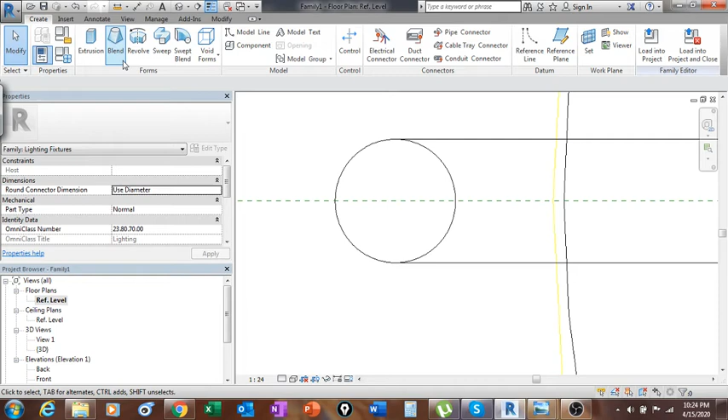Extrusion. I can pick up a line, or I can, yeah, why not? I'm gonna pick up this and this. Not gonna give it any specific depth. I'm gonna fix that on the elevation. I think I'm done with this. Hit OK here. Let's go to the front and see what we have.

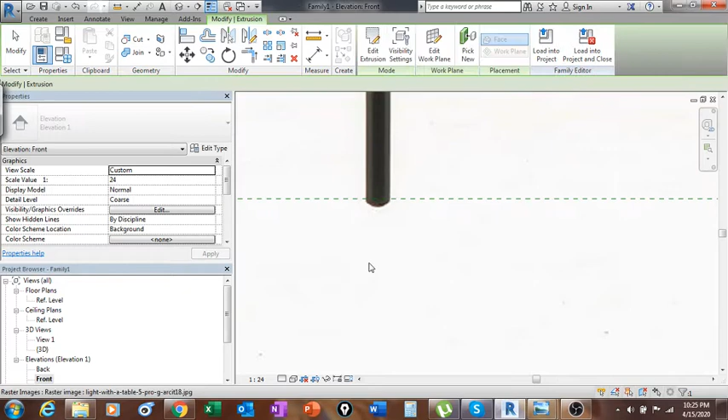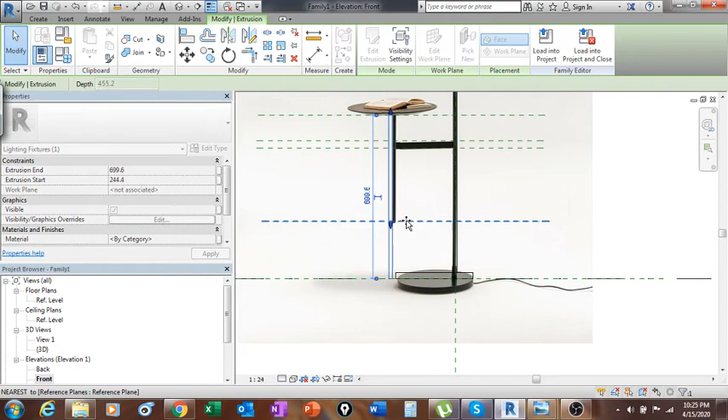So we have this piece. Let's take it. I can lock this, no problem. I'm gonna take this up to here. I'm gonna lock this also. Great. This is aligned with this, right? So great. So now let's draw this piece.

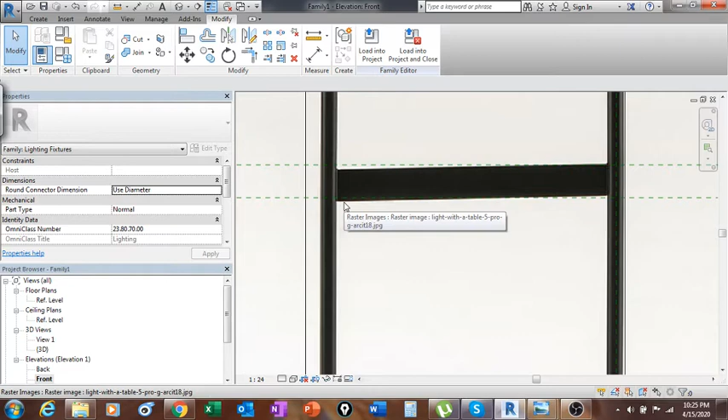So this I can do it from. It's gonna be an extrusion, right? It's a square section, right? So I can do it from here, or I can do it from the top view. I think I prefer to do this from the top. So let's go to the top because I have these reference planes I can use. Now, so yeah, let's do it. It's gonna be a simple extrusion, right?

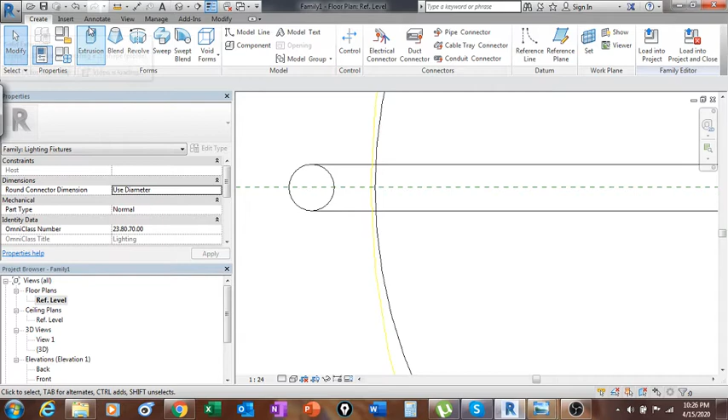So I'll create extrusion, and then what I'm going to do is, let me see, this is 8. I'm gonna make it slightly smaller, right? So it seems to me in the drawing that this piece is slightly smaller than the actual diameter of these two pieces. So that's what I'm going to do. So I'm gonna pick these lines and I use a 6 offset, and I pick this here and pick to the other side.

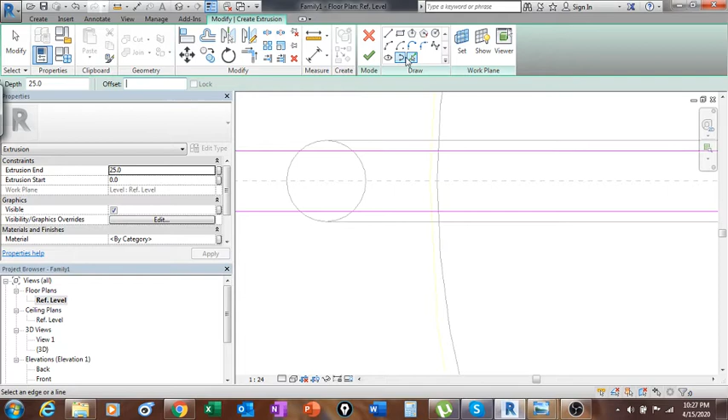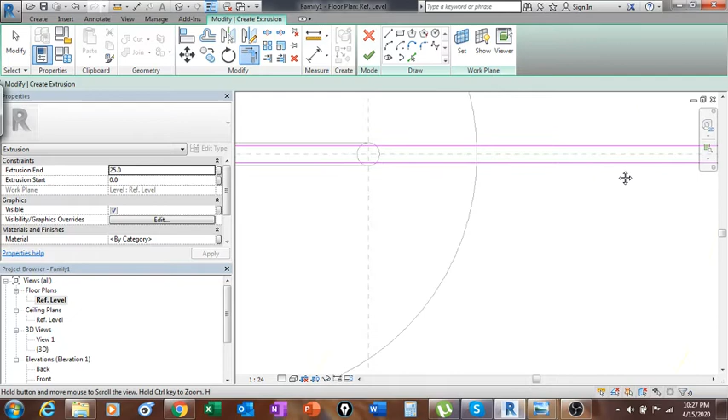Once I do that, I'm gonna get rid of the offset, and I'm going to pick this. I'm gonna pick this, and I'm gonna pick this, and now I'm gonna have to sort of chamfer this. Okay, got this, and this side same thing. I'm going to pick this, and then use the trim tool to get it right. I think we accept. We go to the front, and we have the piece right there.

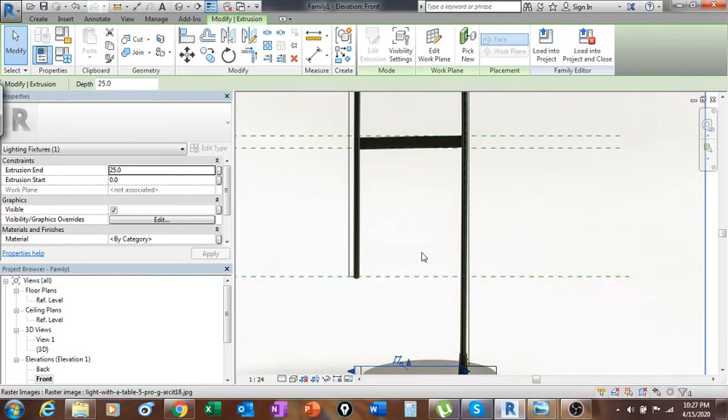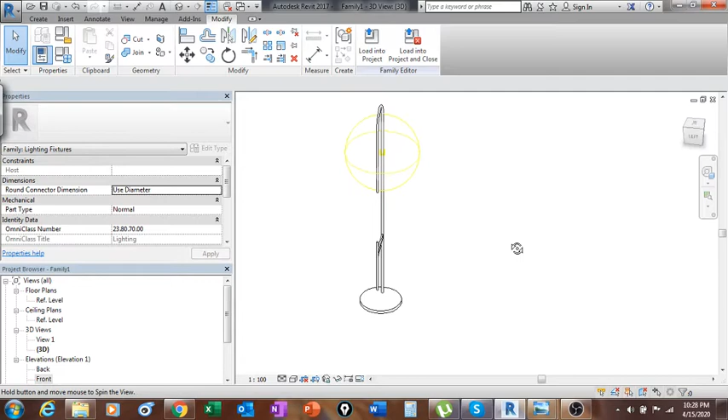So now we have lamp. Yeah, we can close this, and also I can take this to here, and also can lock. Not necessary, but might be useful. Okay, so this is where we are so far. Not bad. Let's go for the table.

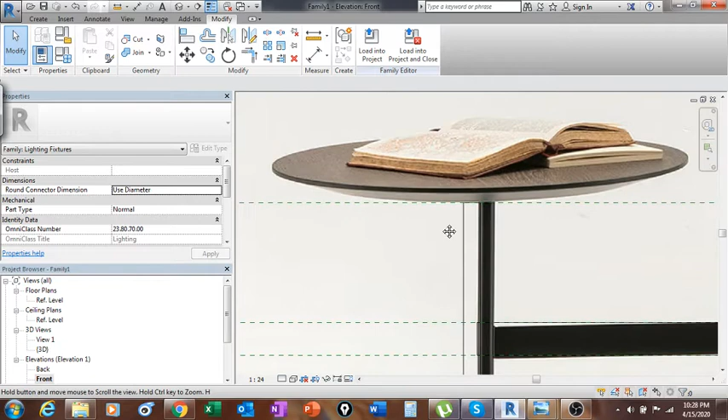Okay, so the table could perfectly be an extrusion, but this actually is not an extrusion. You can see it goes straight and they go in. So for this, I'm going to create a revolve surface. We're going to create a profile, and then I'm going to make this profile go around an axis. The axis is going to be this one right here. I'm going to create the axis beforehand, because then it's going to ask me. So create a reference line, midpoint. So that's a simple line that is going to represent my axis of rotation.

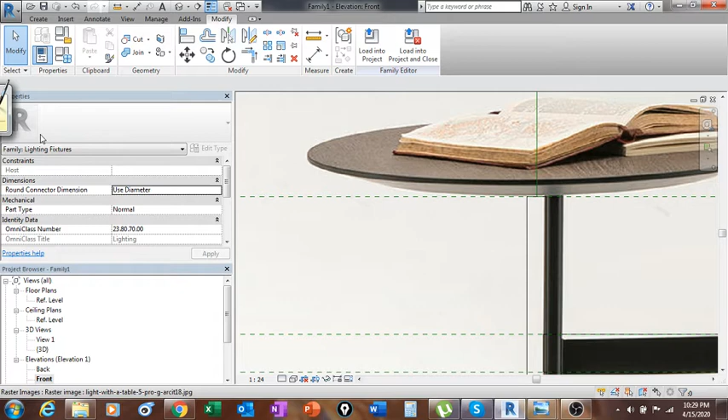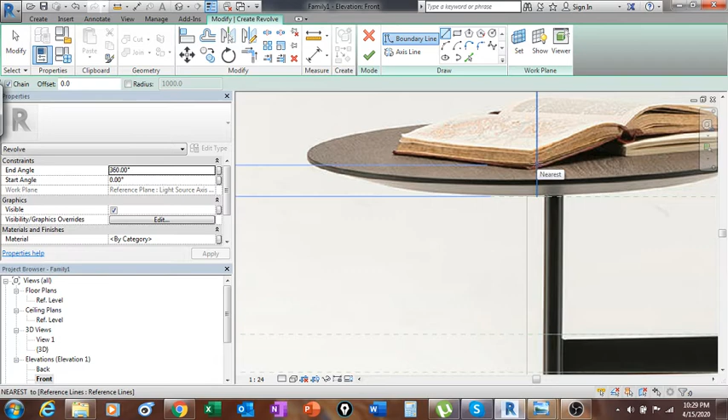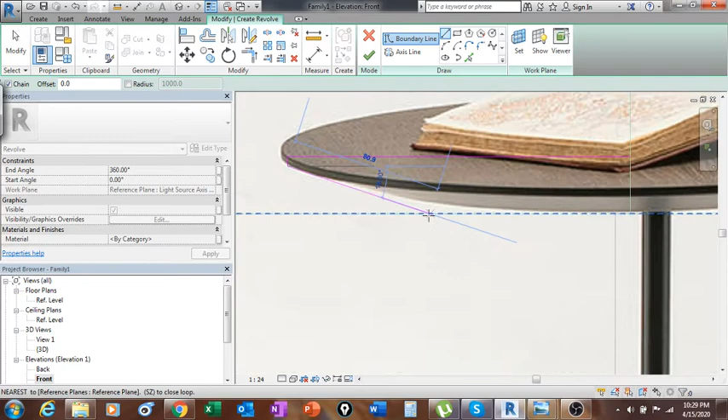The next thing is I'm going to proceed to create my revolve surface. So go to revolve surface, and this is going to be also a two-part job. We're going to have to create a profile, and then we're going to have to define the axis of rotation. This has some perspective to it, so I'm just going to start it from here. Okay, I'm trying to correct the perspective a little bit, and then it goes like this. Okay, and I go back up to here and I make sure it's closed.

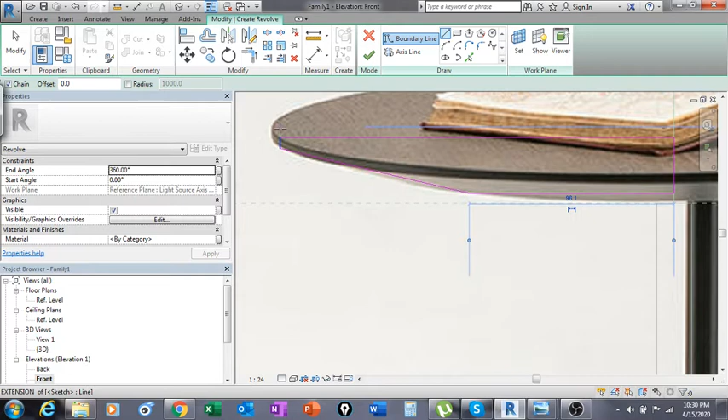Now what I notice here, these are two different materials. The top and the support of the table are a different material, so we're not gonna be able to do it in one shot. We're gonna have to do this revolved surface, and then we're gonna have to actually create the top of the table using extrusion. So this is gonna be good for the support. So I'm just gonna lower this. I guess up to there. It's gonna go somewhere here. I think that's gonna work.

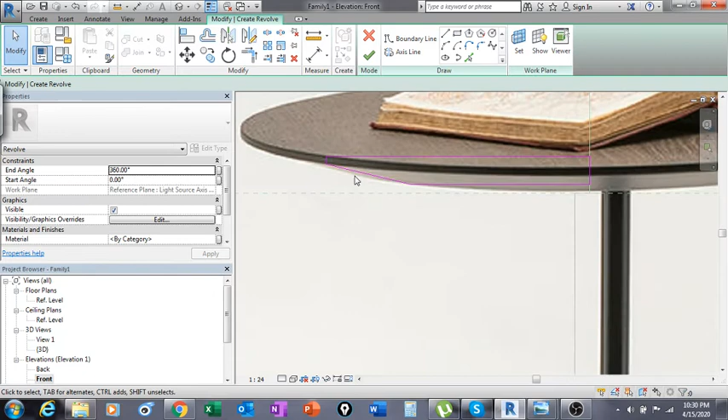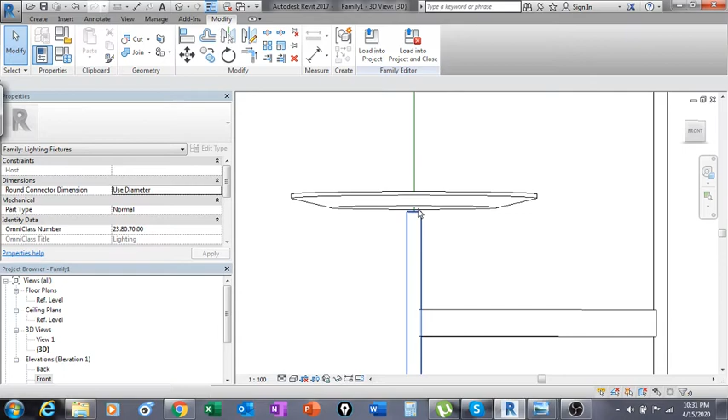So I'm finished with this, and now I'm gonna go to the axis. I'm gonna pick the axis, which is the line that I already drew before, and then I'm gonna accept for everything. Let's see what we have in here. Okay. Now we have this structure right here. We're gonna have to match this front. I'm gonna edit the revolve, and I'm gonna align this here. So that's the support. Now the next thing I'm going to do is create a revolved surface.

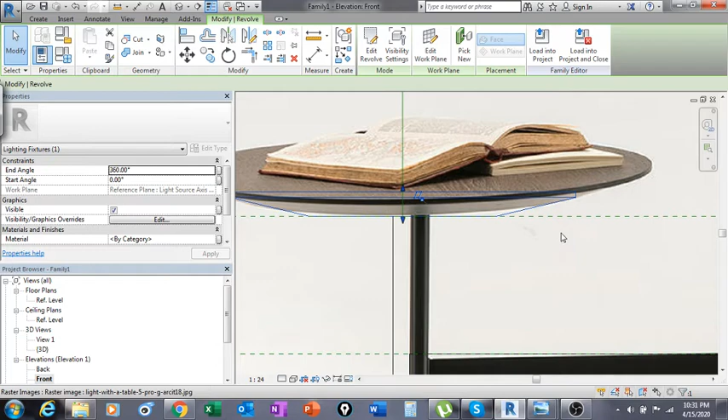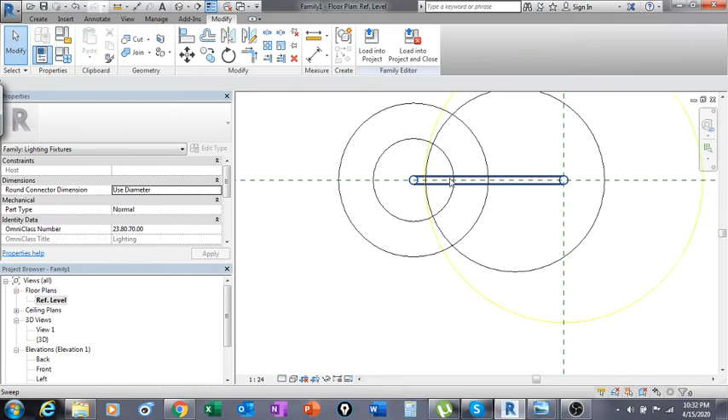Sorry, an extrusion, and that needs to be about 200 radius. So for that, let's go to the top, and I'm going to create right here an extrusion. Okay, I have a problem picking up the center of this, so I'm just gonna have to go out, and I'm gonna have to mark this manually. I'm gonna create also a reference line from the quadrant to the quadrant. So once I do that, I'm gonna be able to pick up the center.

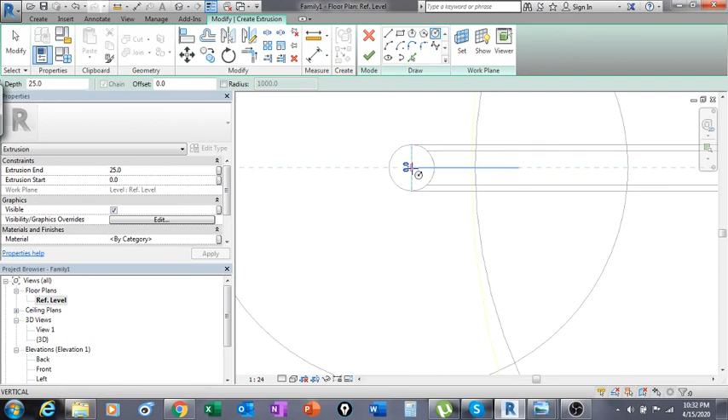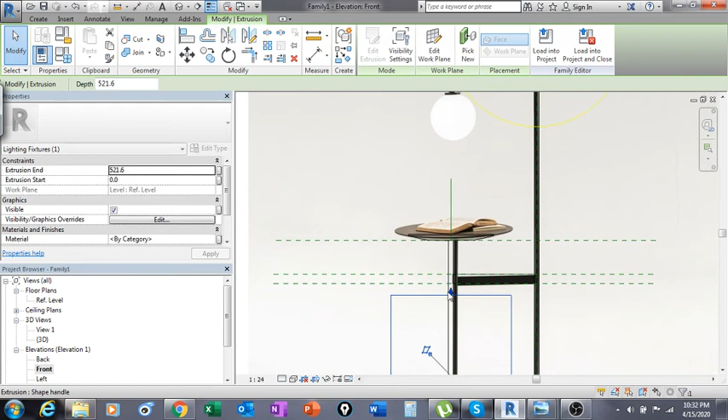So let's go back again and create an extrusion. It's gonna be a circle, and now I can pick up the center. Sometimes this thing happens. So I want this to be 200, and not care too much about this. Hit OK, and let's go to the front, and let's pick this piece. And it's gonna go up to here, and this one we're gonna have to align with this little piece. So we can go AL, pick this edge, and now we're gonna have to adjust the top.

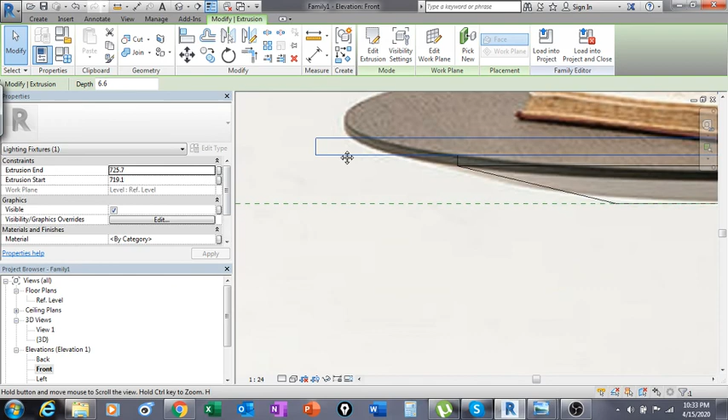We can give it any thickness we want. So let's go here. We can get rid of this, don't need it. And yeah, we are here so far. Great.